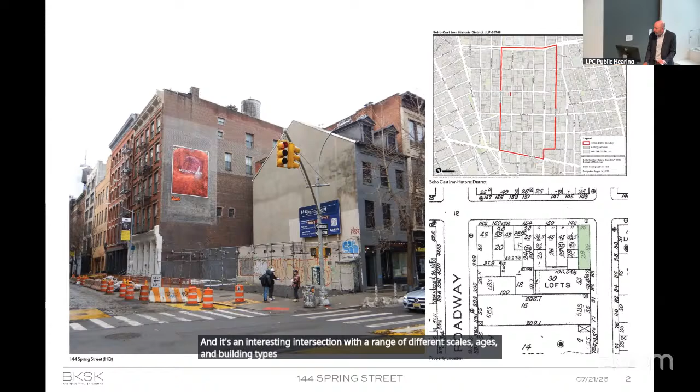On the left is the proposal that we shared with you in June, and on the right is our design revision. A few things just to point out: there was broad support for a 2-story commercial building on this site. We are proposing a building in UHPC, ultra high performance concrete, and there was interest and support for that material.

And the comments that we heard focused in 3 areas. One was just the detail of the UHPC and a desire to see a little bit more study there. You asked us to study the bulkhead and reduce the presence of it and integrate it into the overall design. And also there were comments about reducing the amount of signage that was included in the proposal.

And on the right, our response top down includes modifications to the materiality, height, and color of the bulkhead to reduce visibility and integrate the building and the bulkhead together. We've addressed the articulation of proportionality of the facade and the materiality. And then finally, we have reduced the amount of signage incorporated into the facade.

Just quickly, looking at the site, on the left, that view of the corner and the adjacent 1820s federal style house and the other commercial buildings along the south side of Spring Street, and then a view looking north up Wooster of the vacant lot.

And as we move around the corner, this is around the intersection. This is to the north on the northwest corner, an 1818 row house with an addition approved by the commission in 2010 directly to the north behind it. And then large scale loft buildings, this one on the northwest corner from 1896. And then another store and loft building, this directly to the east, now on the southeast corner of Wooster and Spring Street. So a range of styles and scales at this corner.

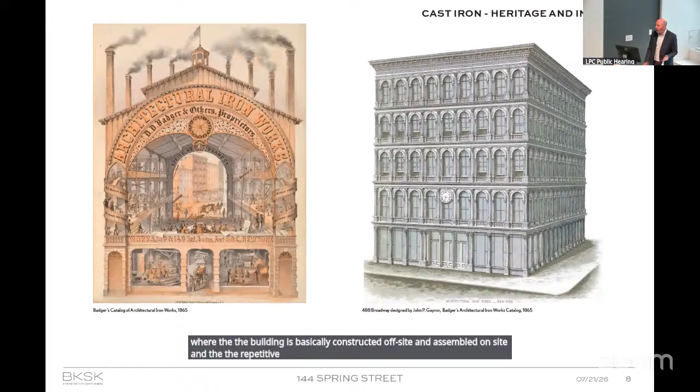And then from that catalog, on the right, an image of the Haughwout building on Broadway, built in 1856. Significant, I think, is this idea of replicating masonry in this cast material, and we've obviously drawn on that concept in the integration of UHPC. The ideas of fabrication, or prefabrication, that come with this material, both the cast iron and the UHPC, where the building is basically constructed off-site and assembled on-site, and the repetitive use of ornament across the facades. Then finally, another page from Badger's catalog, this idea of light transmission.

This is a slide illustrating the presence of vault lights that were integrated into historic cast iron buildings to bring light down into the lower levels. But of course, the facades were also intended to be light transmitting systems, not just at the storefront level, but on the upper floors for manufacture and commercial activity. The images on the right show cast iron and glass vault lights, and on the lower right, the transition from cast iron to concrete vault lights around 1900.

And all of these ideas are informative of our design. David.

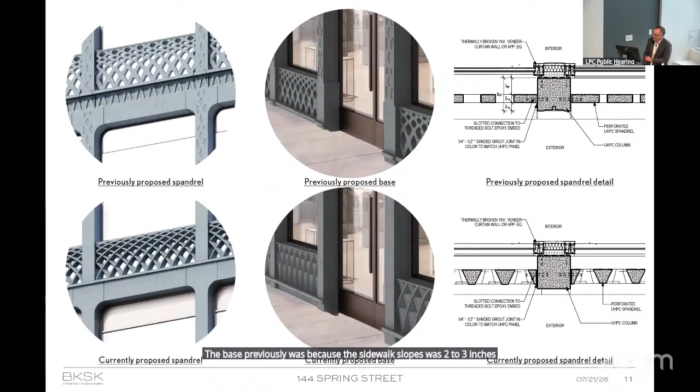Also, in the middle two images, you can see that the base of the building was given a little more dimension. The base previously, because the sidewalk slopes, was 2 to 3 inches above the sidewalk, but in the current design it's approximately 10 inches from the sidewalk.

So here again, you can see a before and after. To touch on the pattern first, by removing the pattern from the columns, we're really pleased with how the primary structural frame reads hierarchically, first and clean. Then the pattern is reserved for those infill elements and a little bit of a decorative moment at the crown of the building, at the top.

You can also see here how the parapet was raised 3 inches, from 3'6" to 3'9". That helped mediate the visibility of some of the rooftop elements. And then just adjusting the signage—on the ground floor, showing something that feels a little more proportionally appropriate for the size panel it sits in. Finally, at the base of the sidewalk, you can see that increased height, which gives it a little more of a substantial base as it meets the sidewalk.

Just looking at the wall section, the little diagram on the left, you can see how the spandrel panels now have that tapered dimension, being 3 inches deep and about 1 inch on the face. The effect of that in elevation is it both feels substantial and appropriate for the overall facade, but at the same time has some detail and finesse to it, so it doesn't feel too schematic or too simple.

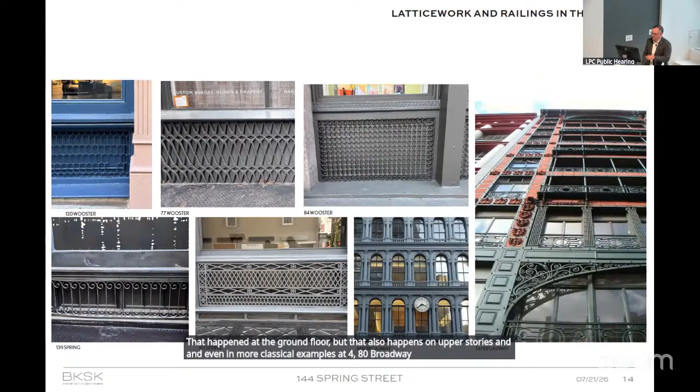Just a reminder that the pattern for us grew out of inspiration from a lot of the existing mesh iron panel work that you see on these spandrel moments throughout the district. What we found was that they'd be quite abstract, simple geometric forms, repeated in an offset kind of pattern to create an interesting texture. That happened at the ground floor, but also happens on upper stories, and even in more classical examples at 488 Broadway, with the balustrade sitting in front of the clear glass window behind.

In terms of palette, we're still looking at this bluish gray UHPC tone, and the storefront remains the same as what we showed you before, with this warm bronze painted finish for the aluminum elements. And the painted metal finish, that smaller chip, would be for the bulkhead, so it could color match the UHPC.

Just a comparison of where we were and where we are. This is the previously proposed elevation. If we skip to the next, you can see the previously proposed in a dashed line with the currently proposed in a solid line. The roof of the bulkhead structure was lowered from 11 feet to 10 feet, and the height of the glass was reduced from 9 feet to 7 feet. That's what really allowed the big differences in terms of visibility from the street.

In this area, there used to be mechanical equipment and mechanical louvers. We were able to relocate that to the other side and keep everything on the north side, using a perforated metal screen there instead, which allowed for a simpler, quieter reading to that box volume on the roof. Here again, you can see the parapet was lifted ever so slightly, from 3'6" to 3'9", which also just controlled the visibility a bit.

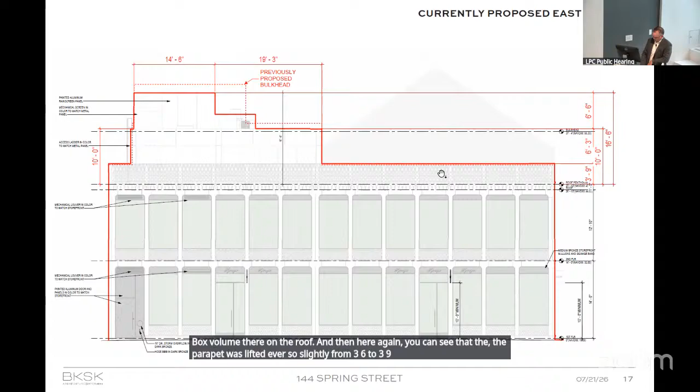Here in section, you can start to see the relationship of those panels and how they're tapered and how they sit in front of the glass. Very similar from before, but that tapered pattern really changes the reading of those panels. You can see in elevation the pattern is actually more solid at the base and opens up as you go higher up into the building. So it still feels substantial, but it has a nice detail to it at the face.

Just a reminder, as Cass said, just like the cast iron elements historically, these UHPC elements would be prefabricated and could be assembled on site with minimal seams between the elements, and really lends itself well to the sort of repetitive detailing and composition to the facade. This is just a diagram on the left for the column and beam panels, as well as the decorative spandrel panels and how they would get assembled on site. The detail in the upper right is just another good view of how the tapered profile would show itself.

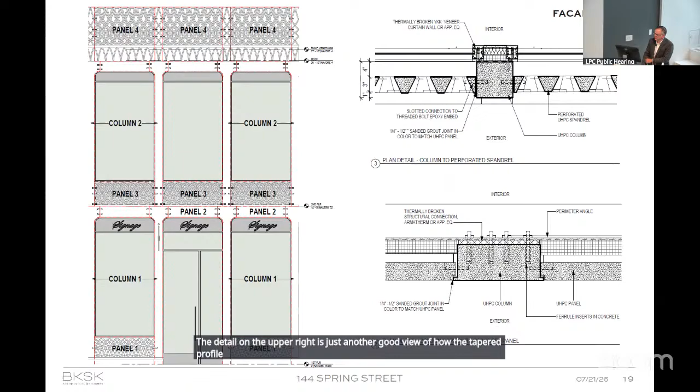Just another more detailed look at the panels and the signage panels, documenting what you saw in elevation in terms of the lettering height, the metal panel height, as well as the flag sign and where that occurs.

This remains the same from the last proposal in terms of we do have a linear light that runs just behind the decorative spandrel panels, giving a soft glow behind these patterned panels at nighttime to accentuate that pattern in the reading of the building.

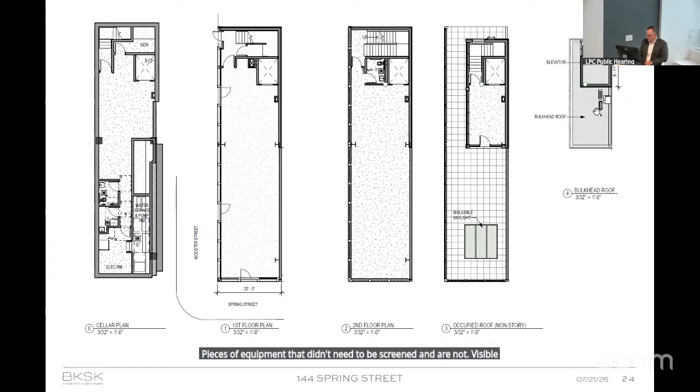So just concluding the previously proposed and the currently proposed, seeing again the differences in the bulkhead adjustments and also further clarity in the design of the UHPC and the hierarchy between the elements.

Okay, commissioners, questions? Commissioner Chen.

Yeah, I'm glad you made the modification to reduce the rooftop addition. And then I'm wondering whether by raising the 3 inches on top of the parapet, have you done a study after making modification without adding the 3 inches?

We looked at both. We thought that this was still the best approach without adjusting it too much. So the options for that parapet are anything between 3'6" and 4 feet. You don't want to go above 4. We tried all of those. 4 feet felt like too much, but the 3'9" still felt good in terms of the balance of the elements, and still having a celebratory top, a sort of celebratory crown to the building, but not overpowering.

Commissioner Jefferson? So a question of architecture versus function. The second floor, you have this strip, used to be for lettering, no longer functional. Why keep it? We did look at that as well.

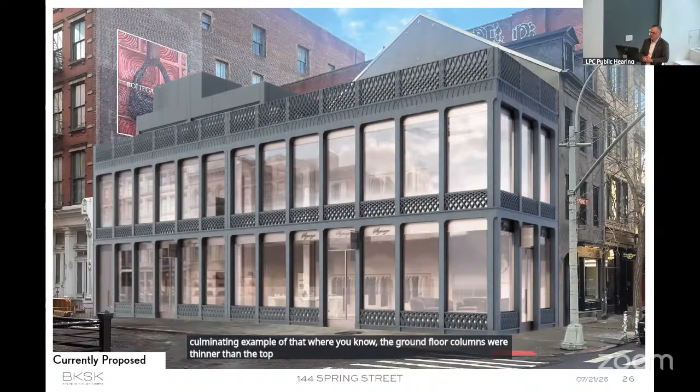It's a great question. So when we looked at the district, we were really interested in the evolution of technology and how cast iron created this sort of story and journey about how architects used it. It began as a faithful recreation of classical stone facades, and then eventually it became its own language. The cast iron could achieve things structurally and proportionally that you would never do in actual stone. 101 Spring Street we showed in June as a great culminating example of that, where the ground floor columns were thinner than the top story. And so that journey was inspiration, and what we said to ourselves was, what's the next chapter in terms of materials that architects could use to reinvent the styles or the languages within the district?

And it felt like UHPC is sort of today what cast iron was then, that it's a prefabricated material. It can take relief and pattern. It could be prefabricated, it could take these soft curves and shapes to it. So it's a very plastic and moldable material. For us, it felt like the next natural evolution in this district in terms of technology and innovation. Thank you.

Any other questions, commissioners? Okay, not seeing any other questions.

I just want to note that we received the following comments since the June 9th public hearing: the Victorian Society of New York recommended denial of the application.

So this is a proposal to construct a two-story commercial building, a taxpayer typology, in a district with a wide range of scales and styles, in a design that is a contemporary interpretation of the cast iron buildings in Soho, like we just heard.

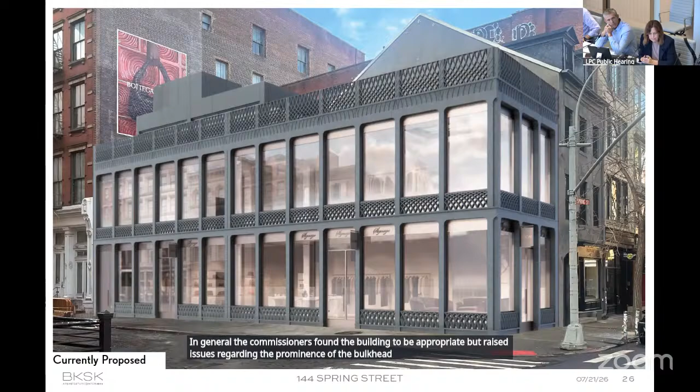In general, the commissioners found the building to be appropriate, but raised issues regarding the prominence of the bulkhead and made suggestions regarding lowering its height and changing the color, suggesting a stronger building base, reducing the signage, and some made suggestions regarding the profiles and details of the panels.

The applicant has revised their design to address many of these comments. Commissioner Ginsberg, would you like to start our discussion?

Yeah, so I found this appropriate last time. I think you've made it better. I will always say I wish there wasn't the screening requirement for the mechanical equipment—I'm going to be a broken record on this—but since there is, you reduced it. I really have no issues with this, and I think the refinement of the panels does make it better and more fitting. I think this is a really nice modern interpretation with a modern material of the type of cast iron architecture that Soho is known for.

Commissioner Jefferson. I find this totally appropriate. I think the revisions they made were wonderful. They made the screening much more muscular rather than two-dimensional—they made it three-dimensional. And with the penthouse being the same color as the building, everything has become much better.

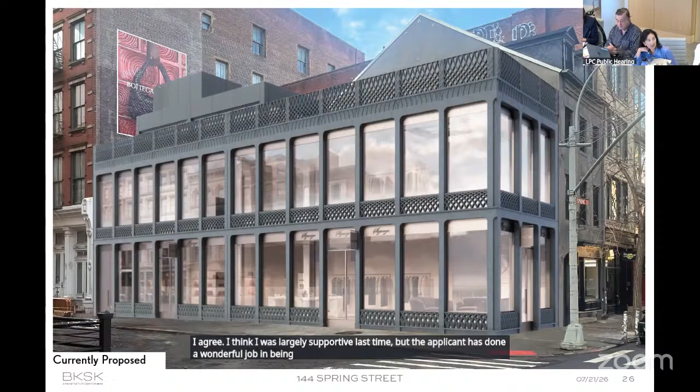And Vice Chair Master. I agree, I think I was largely supportive last time, but the applicant has done a wonderful job being responsive to our comments in terms of minimizing the visibility of the bulkhead, making it blend, increasing the parapet. It was also very effective reducing the signage, and the little changes to the details they made for the facade significantly improve the building. So congratulations, this is wonderful.

Great. And Commissioner Mahan and Wilder, I know you weren't here last time. Okay, so it's two of us, I guess. Not alone. Okay, that's good. Thank you, Commissioner Mahan.

I wasn't here last time, so that may be a reason for having a little bit of a different take than the other commissioners so far. I can certainly find the massing and scale appropriate, the inclusion of the parapet, the setbacks, the bulkheads, and so forth.

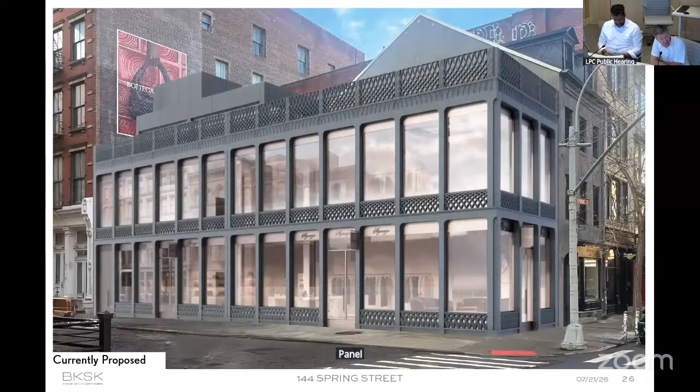I do struggle with the materiality, as I understand it, narrated by the applicant. Cast iron was initially intended to replicate masonry. Now we're using masonry to replicate cast iron, which was replicating masonry, as described by the applicant. These, though, are not the tectonics of masonry—UHPC. So I find it, the materiality and expression of the tectonic, odd—the decorative panels, perhaps. There's lots of really interesting material in the appendix of the application about how three-dimensionality was represented in two dimensions in the cast iron catalogs. The particular expression here, though, for me, is a little reminiscent of garden trellises. So there's, in my reading of this project, a fair amount of mixed metaphors that sort of lead to a lack of clarity, I have to say.

So I'm not sure that this one is for me. Commissioner Wilder?

Yes, so thanks to the applicant. It seems like they have made some updates from the previous presentation, which I was not there for.

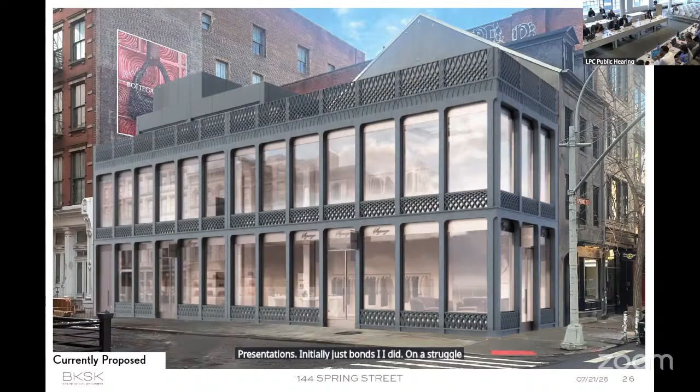Initially, I did kind of struggle with the design and mainly the boldness of it. There are a lot of elements I do like about it.

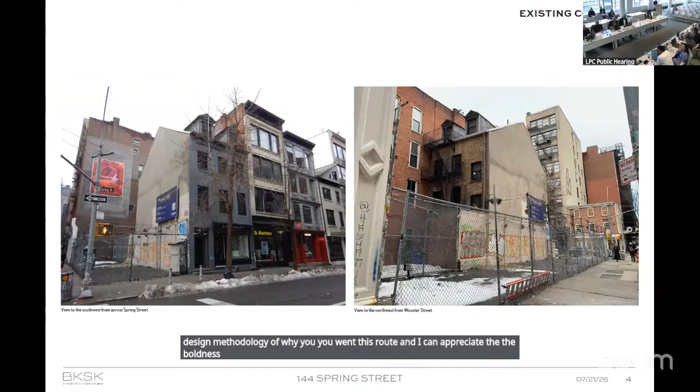I think it was a sort of calculated risk in the selection of the UHPC material, and I say calculated because I think you justified it in your design methodology of why you went this route, and I can appreciate the boldness in taking the chance. I think if you were going to do it, this is probably the best location to do it as well.

So there are things that I like about it. I do enjoy the panels. For me, those are the elements that tie it together and make it work more for me. If they weren't there, I would probably struggle more with it.

I do think that it's too high at the parapet. I think that is probably better. I want it to feel a little more like the spandrel, in terms of the height and scale.

Yeah, it's the analogy, the cast iron. It's pretty interesting, right? I think the building looks good. I'm just struggling with the material overall.

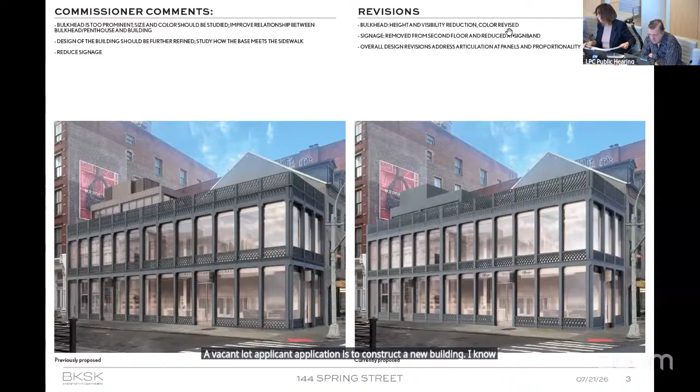Yep. With regards to LPC 26-10512, 144 Spring Street, Soho Cast Iron District, a vacant lot application is to construct a new building. I note that the Soho Cast Iron District is characterized by a range of 19th century building types, including former residential buildings from the early 19th century and larger cast iron and masonry commercial buildings from the second half of the 19th century, as well as low-scale 20th century commercial buildings and two-story garage taxpayers.

I also note that the immediate surrounding landscape features a mix of surviving and altered federal houses ranging from 3 to 5 stories at Spring Street, and large cast iron store and loft buildings ranging from 4 to 6 stories on Wooster. I recommend approval,

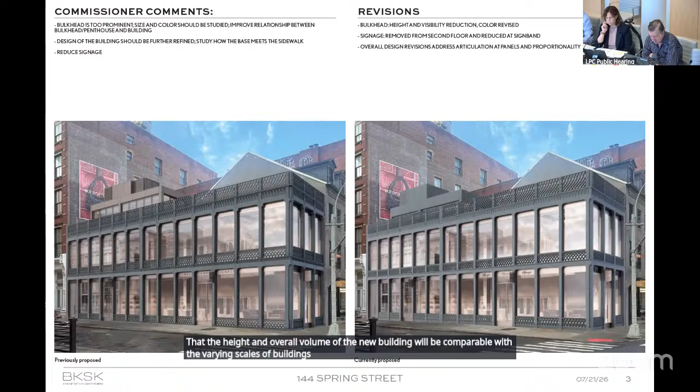finding that the construction of a new building on this vacant lot will provide a termination to the block and will strengthen the streetscape of the corner site, that the height and overall volume of the new building will be comparable with the varying scales of buildings along both block fronts and particularly Spring Street, which features several small-scale buildings, that the plane of the facade will align with the facade of the adjacent properties, thereby reinforcing the street wall, a consistent feature of the streetscape, that in addition to the 19th century store and loft buildings, there are a

variety of other building types in the district, including 1 and 2-story garages and taxpayers, federal houses, and 1930s and late 20th century commercial buildings, which in some cases are either a site-specific response or a zoning-responsive design like the proposed new building.

That the design of the building utilizing cast iron-inspired ductile concrete cladding will employ the latest structural materials in construction and assembly and will recall the evolution of materials in the historic district, which illustrates the evolution of building technology from wood frame houses to masonry, load-bearing construction, and cast iron assemblies, which strive for transparency by encompassing large

areas of glass. That the highly detailed organic pattern precast ductile concrete columns, beams, and cornices, three-dimensional open spandrel panels and railings, all with gray finish, and the simply detailed recessed display windows and entrances at both facades will harmonize with cast iron buildings throughout the historic district.

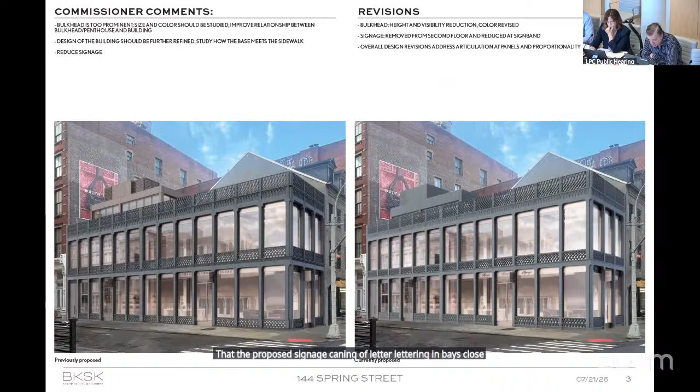That the proposed signage consisting of lettering in bays close to Spring Street and Wooster Street entrances and a blade sign adjacent to each door will be well scaled to the building and in keeping with the signage historically found throughout the historic district.

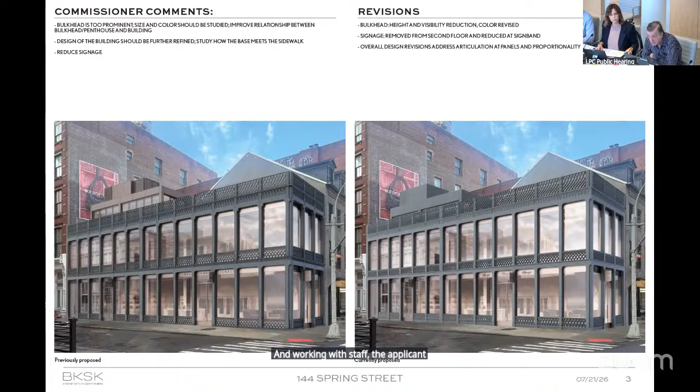That the gray metal cladding, penthouse bulkhead, and mechanical screen are simply massed and subservient to the primary facade below and will blend with the building and be consistent with the existing rooftop accretions found within the district, and that the new building will enhance the special architectural and historic character of the streetscape and the historic district. And working with staff, the applicant can play with the exact height of the parapet.

Vice Chair Master, can you second the motion? Second. And Mark, can you call the vote?

Chair Krusevich, Aye. Vice Chair Master, Aye. Commissioner Chen, Aye. Commissioner Ginsburg, Aye. Commissioner Goldblum, Commissioner Quembe, Aye. Commissioner Jefferson, Aye. Commissioner Mahan, Nay. Commissioner Wilder, Aye. With 8 in favor and 1 opposed, the motion passes.

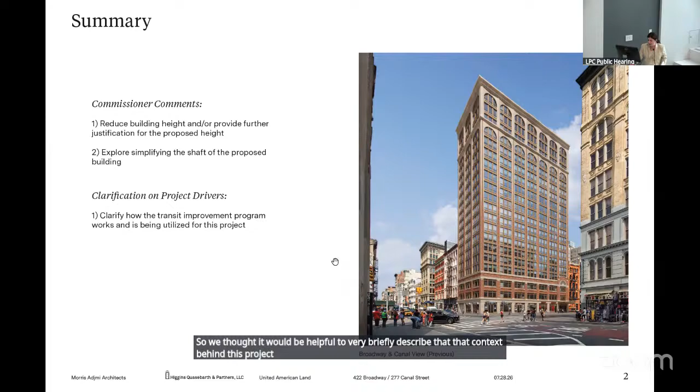It goes without saying, the city is facing a housing crisis, and tackling that crisis requires both ambition and urgency. Creating housing and affordable housing was a chief goal of the Soho-NoHo rezoning in 2021. When it adopted that rezoning, the City Planning Commission noted the particular importance from an equity perspective of adding housing in an opportunity-rich neighborhood that lacks income-restricted housing. That neighborhood rezoning was a precursor to City of Yes for Housing Opportunity in 2024, the single largest change to the zoning resolution since 1961.

Zoning for accessibility is another citywide initiative crafted to make the city more livable by making the transit system more accessible and more quickly. Just 155 of the city's 493 subway stations are accessible. The ZFA text offers a floor area bonus in high-density areas for developers that design, construct, and finance major improvements to a mass transit station. The MTA has identified the Canal Street station as a priority in its current capital plan.

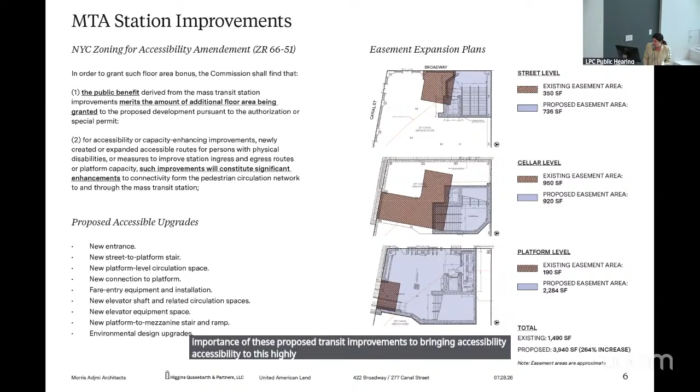As compared to the proposal seen in 2023, shown on the left here, the height of the development has increased to accommodate the ZFA bonus, as shown on the right.

As a standalone site, 277 Canal Street would not generate a sufficient bonus to cover the costs of making a, quote, significant enhancement to the transit network. In order to finance the cost of the improvements MTA requested, the owner made a deal to merge the zoning lot with an adjacent site, seen here in the key plan on the top right. The zoning lot merger increases the maximum bonus available to make the transit scope feasible.

As a condition to merging the zoning lots, the owner of the adjacent parcel required a minimum transfer of development rights, shown in pink. That transfer results in the delivery of additional housing units, including affordable units. In total, the project will deliver 159 new apartments, including 31 affordable units.

Good morning, Commissioners. Christopher Courtney from MA Architects.

I'm going to run through two of the comments that Commissioners asked us to address: explore simplifying the shaft of the proposed building, and reduce the building height. First, I'm going to explain the reasoning for the shift in the building height within the shaft of the building. Previously, I'd only explained that as a marketability concern or issue.

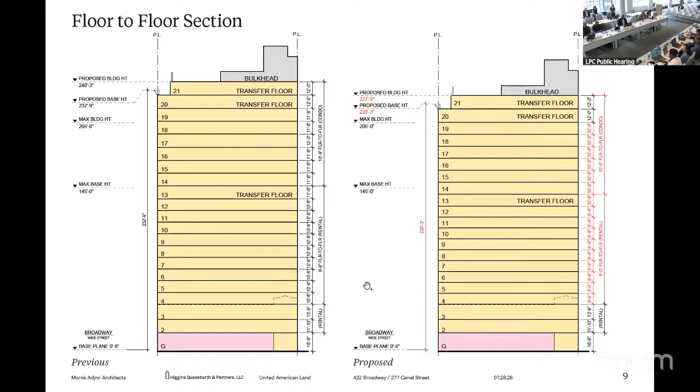Okay. Oh, two minutes, but that's okay. You got it. All right, fantastic.

Thank you. So why 9 feet and why 10 feet? Again, we worked with brokers. We talked through what the minimum standards are in the district in general, which happens to be the same as the whole city. So that's 10 foot for condos as a minimum and 9 foot for rentals, basically just to meet the market. So the building is meeting the minimum market standards moving forward.

Jumping back a little bit to the height difference in the middle of the building, we're zoomed in here to show what's actually happening at the facade when we jump the floor height. So we're at the 12th floor and the 13th floor. We have 9'9", this is the floor to floor.

Again, that's a 9 foot clear, 10'9". All of the floors have the same fenestration pattern of a fixed panel with an operable sash above. Rather than having any of these be the same height as each other, we've given a strategy to break that down and blend dimensions, so for instance 2 feet jumps to 2'3", 5'3" jumps to 6 feet. This is the same strategy we had previously, we just hadn't really gotten into it much to show.

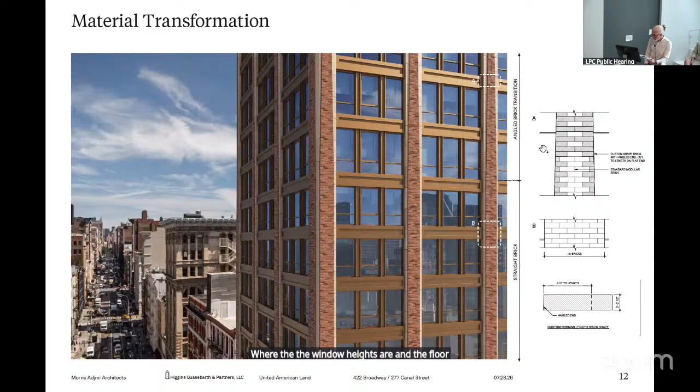As we can kind of compare here, there's a lot more of a balance. Previously, the change was happening as a proportional change through the body of the building only, in equal parts. So the change is really to give more deference to the crown and to read a little bit more distinctly, as opposed to more of a blend, which was happening previously.

Here, if it's helpful, there's a little marker to kind of understand where the floor heights change, and we feel that that's not perceptible from the street as much.

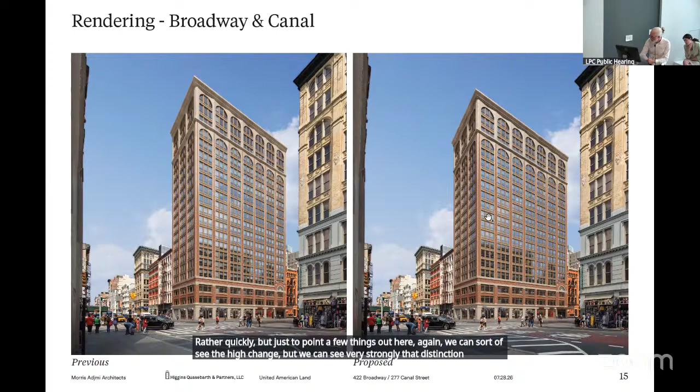Here we can certainly see the height difference change, again 12'6", just a little bit over the height of a floor. Here, certainly from further away, the perception of the floor height shift is not perceived. That's happening right here.

Here we took the opportunity, it's hard to see in this slide, but we took the opportunity to actually lower the spring point that's happening on the sort of faux pilasters on the lot line. You can read that a little clearer here, where previously you could actually read where that change was happening. We wanted to kind of mask that and pull that down.

In this case, the faux arches are the same width as they were, the faux pilasters are the same width as they were. We're just pulling that down and stretching it so that it's out of view from the street above the adjacent buildings.

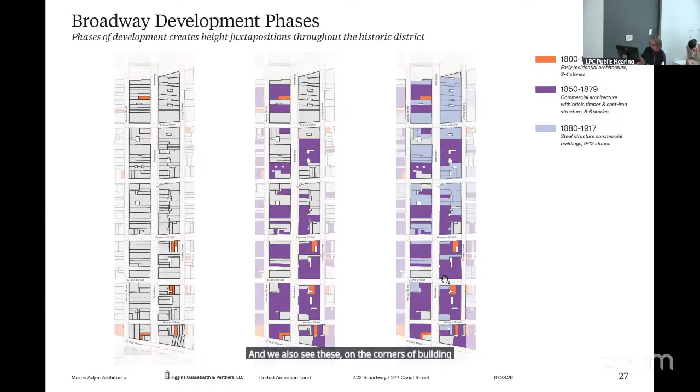We also see these specifically on the corners of buildings in the district. So here are two examples, and again these are just select examples - it happens along Broadway. But looking at the corner specifically, and the condition where we step down to a lower scale on the side streets.

Immediately to the north of our block on the corner of Howard and Broadway, we have 434 Broadway, and you can see the step down along Howard Street. We've provided the proportional relationship of the flanking buildings here. The adjacent building on Howard is 125% smaller than the corner building. We have a later building outside those significant periods of development, but it speaks to the character of the variegated streetscape and abrupt changes in scale on Broadway. That's something close to 350% taller than the adjacent building at 440 Broadway.

Moving north a bit to 458 Broadway, on the corner of Grand Street, we have that late phase tall building anchoring the corner, and then the stepping down of the earlier phases. Here you see the earliest phase and then a somewhat taller building. This characteristic up and down that we see on Broadway, which is more populated with tall buildings, but on the side streets there's a distinctive step down in scale and character. That's a sort of 200% decrease in scale.

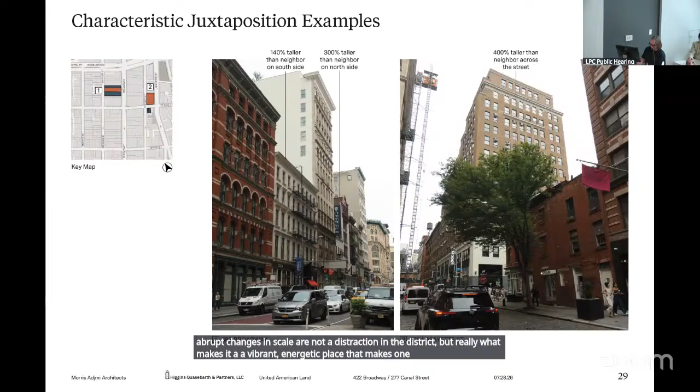So this is how you experience the buildings. This juxtaposition and abrupt changes in scale are not a distraction in the district, but really what makes it a vibrant, energetic place that makes one look up in the district. We see that in the overall streetscape.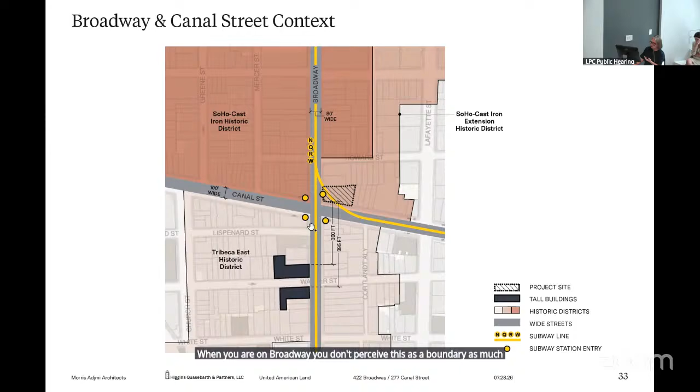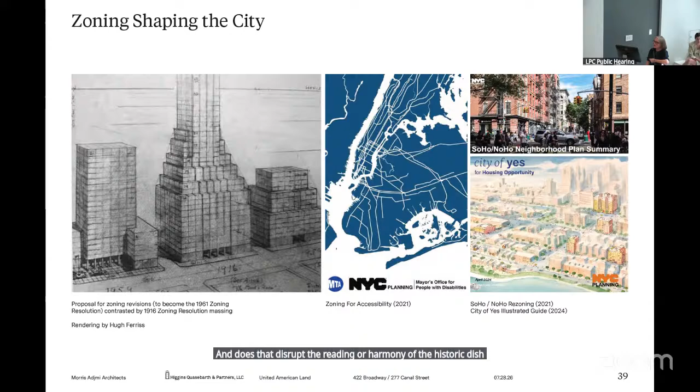This proposal is really in the context of that. How do you shape something that needs to deliver on all these important civic initiatives and be of today? Does that disrupt the reading or harmony of the historic district, or does it stimulate it? Does it energize the streetscape? Does it create something new? Our argument is that it creates something new and stimulates the environment.

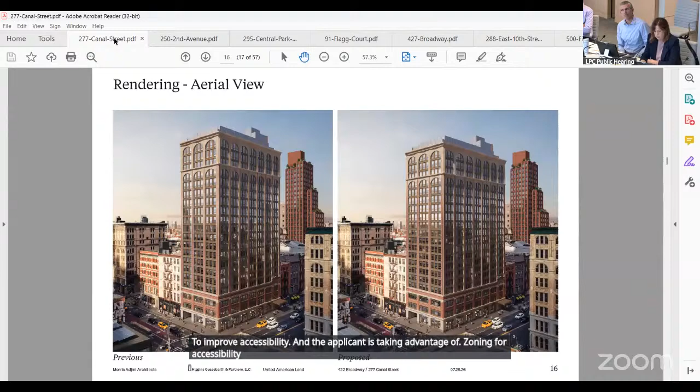MTA designated this as a high priority site to improve accessibility, and the applicant is taking advantage of the Zoning for Accessibility program, a citywide program to promote subway accessibility. The site also is unique in that it fronts 2 wide streets, Broadway and Canal, both of which have taller buildings, changes of scale, and a variety that are different from some of the smaller streets in the Soho district. That's something most commissioners noted in the last hearing. In addition, Soho is a district that can be dramatic in terms of differences of scale between adjacent buildings and buildings on the block. So that is another factor to consider.

Oops, my mouse is going nuts here.

At the last hearing, commissioners all agreed that a taller tower addition to the 3-story historic building is acceptable. Comments were largely positive about the overall proposal and the transit improvements, and positive about the storefront infill and signage master plan, unchanged from the prior approval. Many commissioners asked for further explanation on the appropriateness of the building given its height, and many found that the proposed height, given the location on 2 wide streets, to be appropriate. However, most commissioners recommend that the floor-to-floor heights be consistent to lower the overall height of the building.

There were some design recommendations. Several commented on how it accentuated the verticality and questioned that approach. The applicant has come back and has been responsive to many of the commissioners' suggestions, including reducing the overall height by lowering the floor-to-floor height of most of the floors, although it's not consistent, as we've heard, and adjusting the transition of brick to terracotta at the piers to help de-emphasize the verticality of the facades. And they came back also with a stronger justification for the appropriateness.

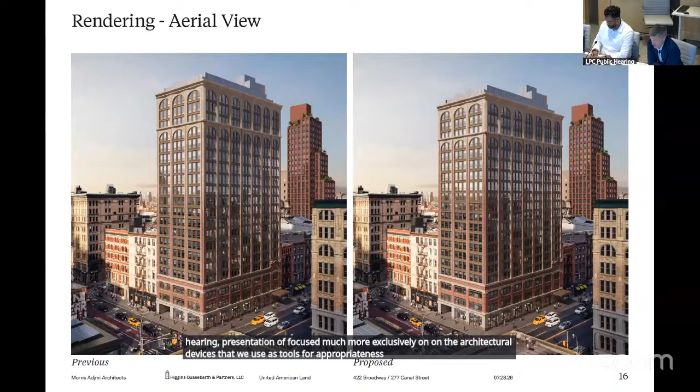The public hearing presentation focused much more exclusively on the architectural devices that we use as tools for appropriateness. However, those cannot only be self-referential; they can only be found appropriate in how they relate to the context. And so I really appreciate the level of sophistication that this team brought and the level of scholarship that was brought to this argument.

I actually think it's quite necessary to carry the day for a project of this magnitude and complexity. I found the abrupt changes in height, the juxtaposition, to be meaningful and notable.

I think it is important. It is a characteristic of these two streets. I went and walked around these two streets recently after the public hearing to get the feeling for the energy. And I think the energy of the people and the commerce that occurs here is reinforced by the kind of surprise, juxtaposition, the kind of jumble of architectural scale and style.

I think those things mutually reinforce one another. I agree with Commissioner Goldblum about the metrics, the devices, but I think the underlying ideas is completely sound and important.

I think the fact that these are both wide streets is important. The fact that taller buildings occur at corners is important. I think the proportions are notable. Particularly helpful was 458 Broadway, which has proportions similar to this particular building.

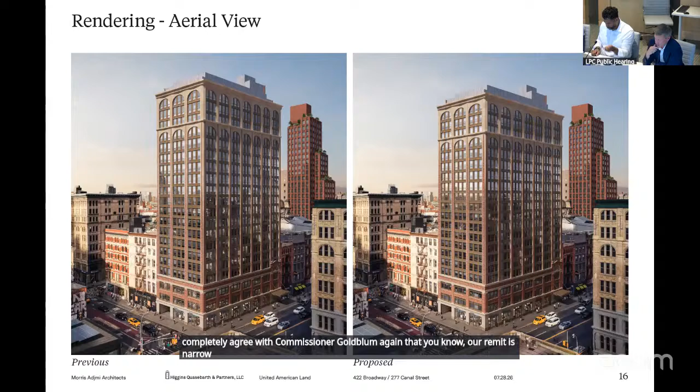In closing, I completely agree with Commissioner Goldblum again that our remit is narrow in analyzing appropriateness. But this is a project that reminds me how somehow I'm always amazed that preservation becomes the kind of locus and expression for a whole host of social and community issues, and they are the context.

The background against which we are measuring appropriateness: local community concerns, including identity and change and historical continuity in our management of change, changing construction technologies, as the applicant talked about, civic needs such as housing, as they're expressed through zoning and finance, and even Aaron's shock that shopping is not as of right in Soho, all found expression in this project. So I can find it appropriate.

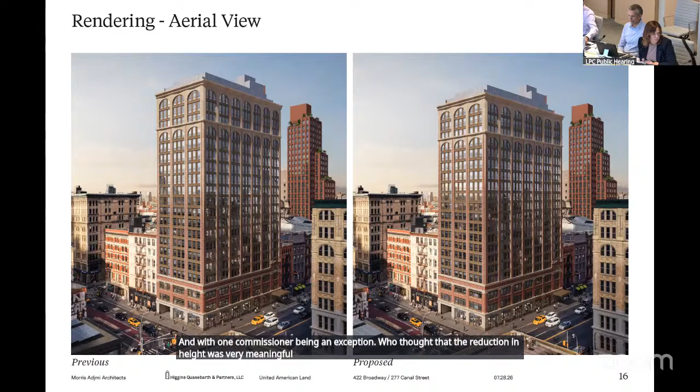Thank you. So Commissioner Goldblum, I think we can make a motion. I think we have a majority of commissioners who felt that regularizing the floor-to-floor heights was more important than the reduction of the overall height, with one commissioner being an exception, who thought that the reduction in height was very meaningful. So I think if that's the majority, then that's probably the way to go with that direction.

But again, I think as another way to make it regular, by the way, not that I think that they would do it, is if you interspersed rental, condo, it would be very uniform.

I would suggest we go approve it as the majority suggested, and then if there were opportunities for minor adjustments, we would go along with that as well.

Got it. Regarding 277 Canal Street, also known as 277-289 Canal, 418-422 Broadway, in the Soho Cast Iron Historic District Extension, the application is to construct a vertical enlargement and establish a master plan governing the installation of storefront infill and signage.

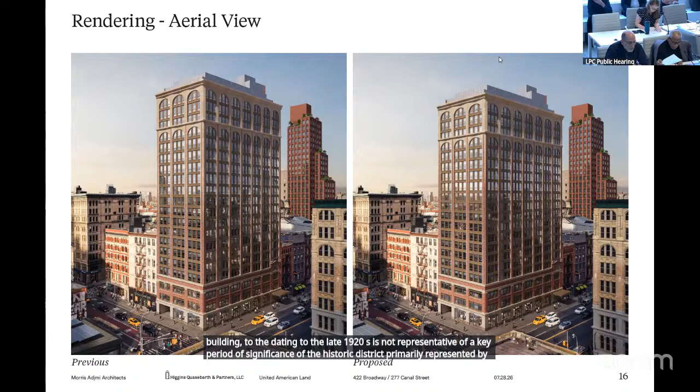I recommend approval with modifications, finding that the existing 3-story building dating to the late 1920s is not representative of a key period of significance of the historic district, primarily represented by its 19th century cast iron store and loft buildings. That this simply designed building was originally built as a theater, a use that does not relate to the commercial and manufacturing history of the district, and that its height does not define its typology. Therefore, constructing a large vertical addition will not detract from the architectural style of the building or of the special historic and architectural character of the Soho Cast Iron Historic District extension.

That there is a historic precedent in the Soho Cast Iron Historic District and its extension for vertical building extensions constructed in plane with the original building base and designed to be an integral part of the facade. The Broadway and Canal streets are wider than other streets within the historic district and feature corner buildings which are often notably larger than the buildings found on the side streets, and that the existing building features a larger lot area and longer street frontages than the typical lots in the district. Therefore, total building height could fit well with the overall scale of the streetscapes.

But there is historic precedent throughout the city for buildings featuring entrances to major subway hubs being taller than surrounding buildings. Therefore, a taller building at this location, which includes entrance to multiple subway lines, will continue this typology. That significant juxtaposition of buildings with differing heights is a condition found in the Soho Cast Iron Historic District and extension, particularly along Broadway.

That the composition of the vertical extension set upon the existing building as a base, with a taller middle shaft featuring tripartite window bays with spandrel panels at each floor and a 3-story crown and cornice, reflects the typical composition of other tall masonry buildings within the historic district, and the historic building at the base will remain legible.

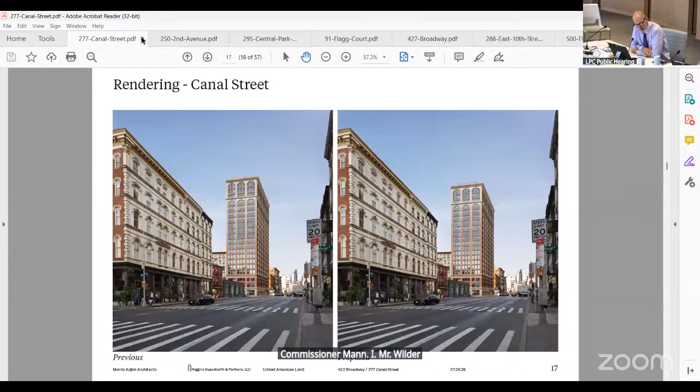This is Stuyvesant Square Park, a public park originally designed in the 1840s and redesigned by Gilmore D. Clarke in 1937, including a restroom building built in 1937. The application is to replace and modify planting areas, fencing, pathways, and paving, replace windows and install security grates, and regrade a section of the park.

This was last presented at the public hearing of March 24th, 2026. No action was taken at that time. The applicants will present revisions to the proposal in response to your comments after we open the proceedings.

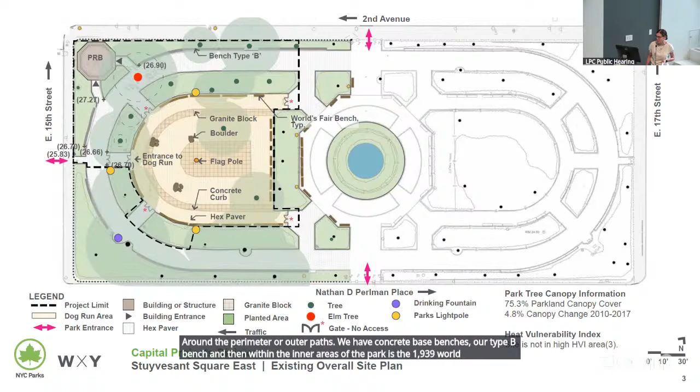So our existing conditions in the upper left is that public restroom building that has steps leading up to it. The paths are all asphalt hex block. That center yellow area is a very popular dog run. Around the perimeter or outer paths, we have concrete base benches, our type B bench. And then within the inner areas of the park is the 1939 World's Fair benches. And then that red dot again is that tree that's planted in the middle of the path.

Here are some images of our public restroom and the tree in the path. As we discussed at the public hearing, it's not possible to make this path accessible without removing this tree, which is not something we'd consider for a variety of reasons, especially its significant environmental benefits. But the roots of the tree extend about 25 feet from the center and are heaving the pavement, causing a dangerous condition that is impassable for someone with mobility issues. We've been working very closely with our parks arborists, who are experts in urban tree health.

Here's a view of the dog run on the left and then an image looking south toward the public restroom.

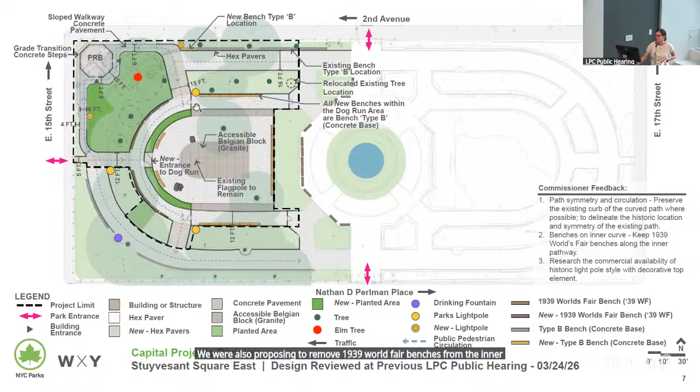This was the plan we presented back in March, and a brief summary of the feedback we received. We were proposing to cut off this path entirely and expand the planting bed for the health of the tree, and also to remove the dangerous walking conditions. We proposed sloped walkways to provide barrier-free access to the public restroom building, and installing 2 new light poles to illuminate those paths. We were also proposing to remove the 1939 World's Fair benches from the inner curves and replace them with the type B bench, typically along the outer paths of the park.

The feedback we heard was related to concerns about what cutting that path off does to the symmetry and circulation of the park. There was concern about changing the 1939 World's Fair benches for a different bench type at the center, as that would be inconsistent with the historic design. And then we were asked to look more closely at our design for the proposed 2 new light poles.

Sorry, went the wrong way. Okay, so this is our revised plan. We are no longer proposing to completely remove this path, but we are proposing to preserve the curbs in place and remove only the hex block from the center. We are no longer proposing to replace the 1939 World's Fair benches with a different bench type, and we are also proposing to restore and salvage 7 of the existing 1939 World's Fair benches. We also looked a little more closely at the lighting within the park, and I'll share more information on that in a later slide.

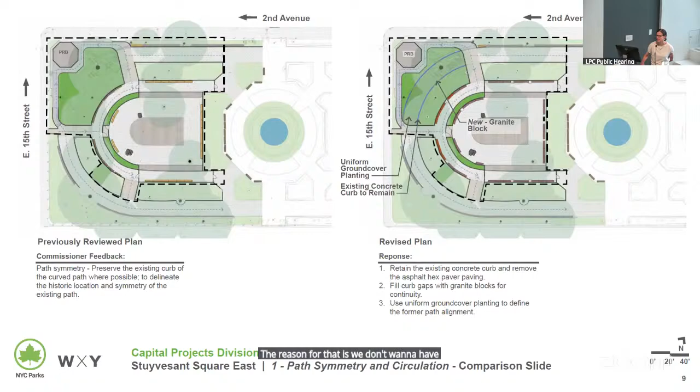One other thing I should mention is where there was a connecting path, we are proposing to install granite block. The reason is we don't want to extend the curb and do more excavation, which could damage the tree root. Granite block already exists in the park, and we want to keep this solution as reversible as possible.

Here is existing and proposed. We do need to keep this area fenced off still, as we don't want to encourage people to walk over the tree roots and compact the soil around them. But this image also speaks to the fact that this tree is not going to live forever, and when it does die, this fencing can be removed, the asphalt hex block returned, and the path fully restored.

Another image looking south.

Our planting plan: within the path area, we are proposing a low ground cover shown here on the upper left, and then within the planting beds there will be taller plants to differentiate and maintain that path-like appearance.

Regarding the benches, we are going to be using all 1939 World's Fair benches within the inner paths, no longer proposing a new bench type, and preserving and salvaging 7 benches.

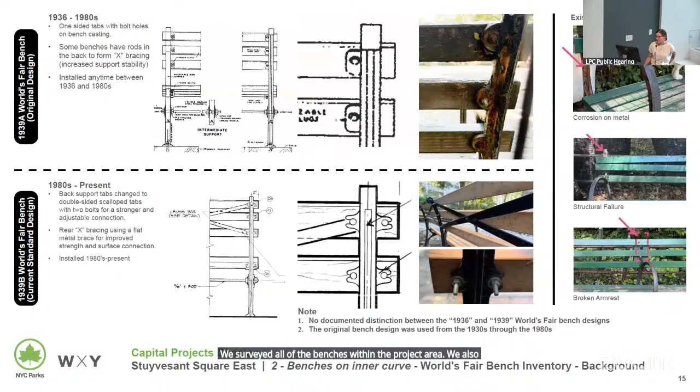After the hearing, we did a real deep dive on our 1939 World's Fair benches. We surveyed all of the benches within the project area, and reached out to the original manufacturer, still the current manufacturer of the 1939 World's Fair benches, trying to determine if there was a difference between the original design and our current standard.

The World's Fair bench was designed in 1936, and in the 1980s the design was slightly modified at the rear to strengthen the connection between the base and the slats. That was the only change we found between the 1936 and 1980s design, which we're currently using today. Here are some original drawings, the 1936 design and the 1980s design, which is our current standard. The overall dimensions and detailing remain the same.

Within the dog run, we were proposing to change the bench type to the concrete-based bench. The reason was that we had heard from the dog run people that dogs were getting their paws caught between the two front slats. So we're now proposing to modify that front slat to minimize that gap, and as you can see in the image, even the tiniest of paws will be safe, and we can keep our historic bench type.

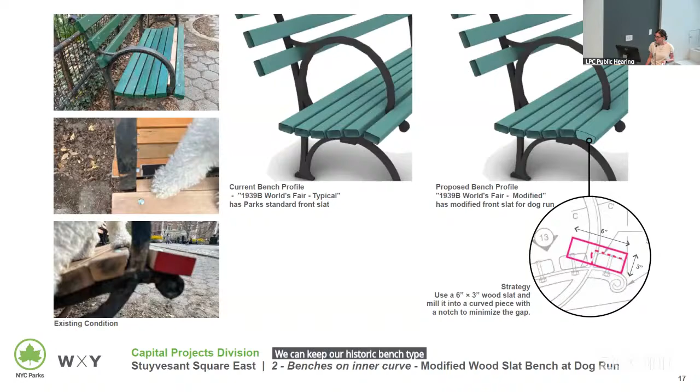So our proposal for the 2 new poles is to utilize the type B pole with the Riverside luminaire. While there are only 2 of the Riverside luminaire, it is our hope and plan that as these are replaced in the future, we will have them replaced with the Riverside luminaire, as this is a more appropriate design for a historic park. We did investigate having a custom casting done of the type E pole, but it was a bit beyond the project budget.

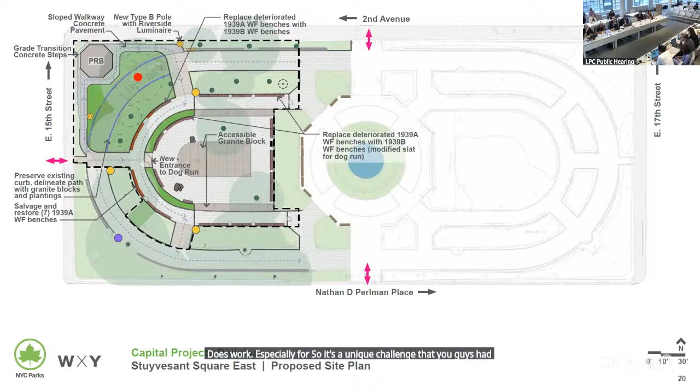Yeah, thanks to the applicant for coming back and trying to preserve as many of the details that we thought were important before. I do agree it was a clever idea to have a concrete curb. It works, especially for such a unique challenge that you guys had to deal with, and preserving as many benches and lampposts, both are a great idea. So yeah, I find it appropriate.

Great, thank you. Commissioner Mahan. Yeah, I concur. Don't have anything else to add.

Okay, Commissioner Goldblum. Thanks. Yeah, I think it's generally moving in the right direction. I think the retention and restoration of the benches is great, and keeping the bench design uniform and consistent with the historical condition is important.

I think the retention of the ghosting of the path is good. I would suggest if they could explore the possibility of taking that a little bit further. The fencing, I think, is a very strong element in how people experience the space. Could they continue the fencing along the path line? Could they change the fence where the ghost path is, so that there was some indication of the path visually continuing, even if you can't walk there? Looking at how the ramp element intersects with the center pathway, I would just say think through how you want this to look when you make it paved, and make it as close to that as possible. But I think this approach is a very good first step.

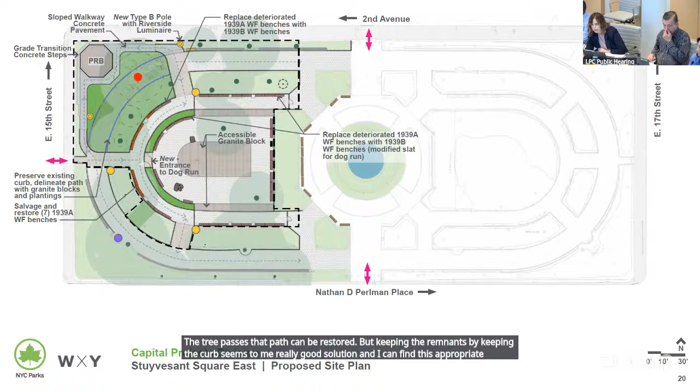And Vice Chair Master, I don't think you were here at the first one. No, I wasn't here. I can accept this as presented, I find it appropriate. I just want to say that I'm really happy as a dog lover that you guys reached out and found that the paws could potentially get stuck in the bench. I think that's very important, especially given that there's a dog run there. So I commend you for doing that.

And Commissioner Chen. I echo the vice chair's sentiment, one good thing about this is the paws won't get caught anymore. But I also concur, I think it's very clear, and I commend the Parks Department for keeping the memories alive of the World's Fair benches in the improved version. The one comment I agree with Commissioner Goldblum on, and I felt Commissioner Ginsberg as well, is the fencing. I think the fencing could be worked on. I think somehow it just pops out, and if there's a better way to treat it, I think we should explore it.

Great. So Commissioner Kwambe, I think you could read a motion and add that the applicant should work with staff on the fencing or explore the fence with the implied path, to explore the interaction with fencing and the implied path and the landscape.

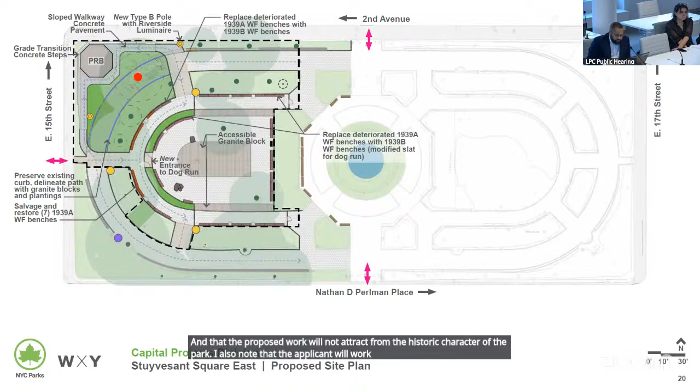That the proposed metal windows and doors at the restroom building will match the historic wooden windows and doors in terms of configuration, operation, finish, and details. And the change in materials will be largely imperceptible. And that the proposed work will not detract from the historic character of the park. I also note that the applicant will work with staff to define the path in conjunction with the proposed fencing.

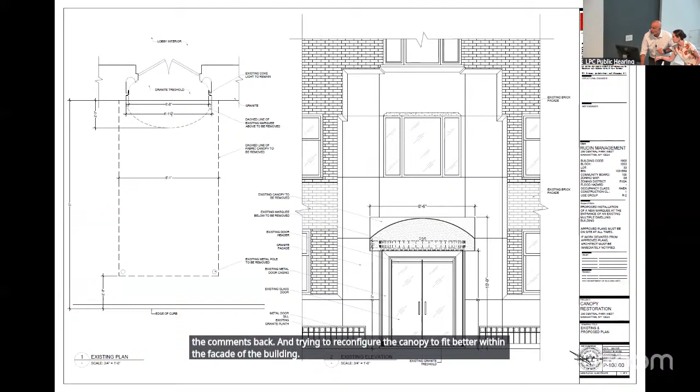My name is Joe Sultana. My firm is JLS Designs, out of Bayside, Queens. This presentation is to remove the existing fabric canopy and replace it with a fixed marquee.

From our first presentation, we started changing the shape of the canopy. The most important thing was the structural components of the marquee. Originally, there were tiebacks supporting the marquee back to the building. We've worked with our structural engineer, and now those tiebacks are not structural anymore—the marquee is structural on its own. So the tiebacks were placed in a different location.

That was one of the comments a commissioner raised, whether we could look at it not just as a single image of the canopy and the linear entrance, but along the entire front of the building.

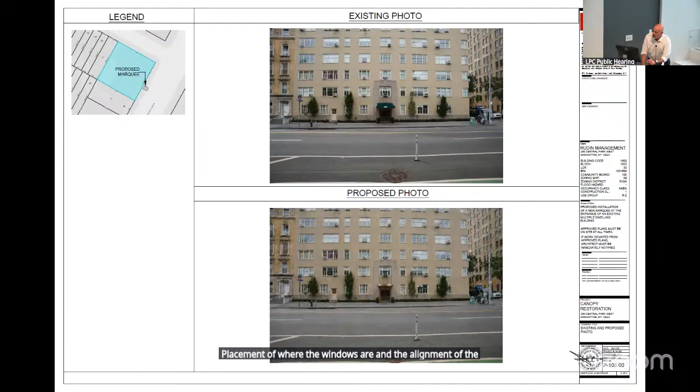So what we did—I don't know if the pictures are out of proportion—but we made it a lot smaller, basically the same size as the existing fabric canopy. We just raised it; we have to raise the bottom to 10 feet, like I explained last time. So the top line of this marquee is at the same placement as the fabric canopy.

That one on the right is the new shape. These are the two, the original and what we came up with now. I don't know if anybody has questions about the way it looks, but that's what we're presenting. Thank you.

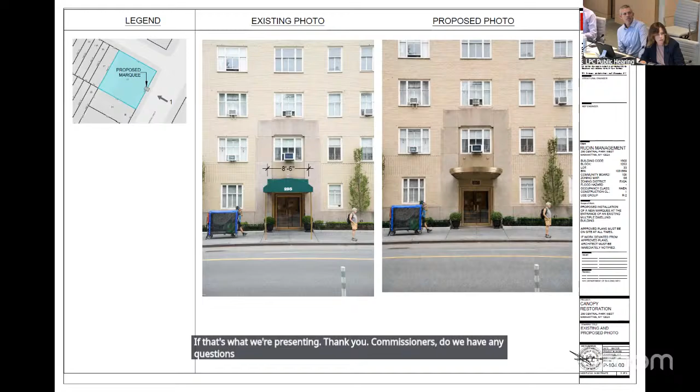Commissioners, do we have any questions? Commissioner Mahan: What material is the canopy—the marquee? Right now there's a metal painted door and existing canopy that I presented last time.

If I go back to this drawing, that area above the door that's dotted is the existing canopy that's there now. It's all painted metal—we had it tested to make sure it's not a special metal, it's just the paint. Same color.

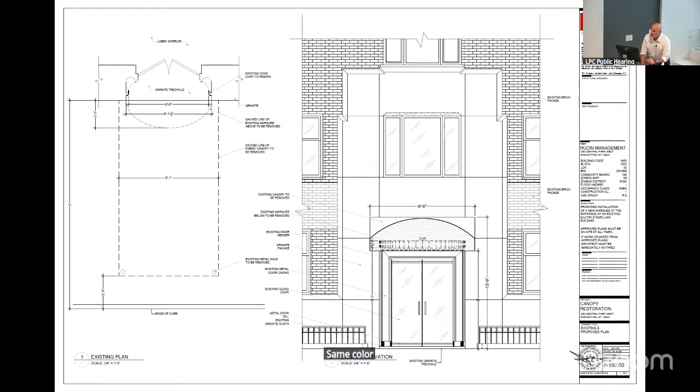Any other questions? Okay, not seeing any. We'll move to our discussion. I'll note that we have not received any testimony or comments following the March 10th public hearing. The commissioners present at the last hearing generally supported this proposal in concept—there were no objections to the materiality or design. However, they expressed concern about the size and proportion of the marquee, particularly its width in relation to the vertically oriented entrance and the building overall.

So I'll start with the commissioners who were here. Commissioner Chen, could you start the discussion? Yeah, I'm glad they made changes and improvements. I think the reduction in size and width is much more in line with what we suggested, so I find that appropriate—it works well with the proportions of the existing graphic pattern.

Commissioner Goldblum? Great, appropriate. Commissioner Wilder? Yeah, I was here too—I think it's appropriate, good job on the reduction. Commissioner Kemge? Definitely appropriate, the proportions are much better.

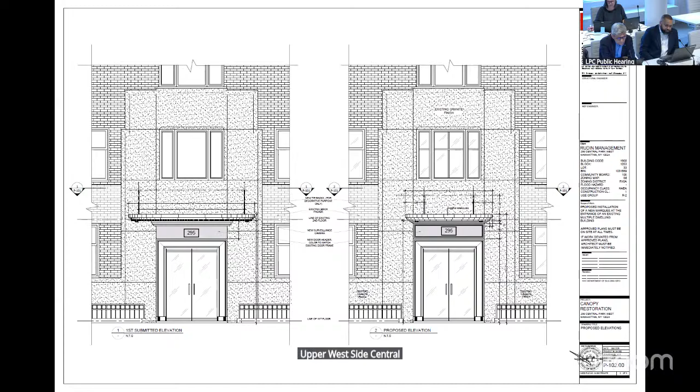Delighted to. In the matter of LPC 26-03193, 295 Central Park West, Upper West Side Central Park West Historic District. The application is to replace a marquee, noting the building style, scale, materials, and details among the features that contribute to the special architectural and historic character of the Upper West Side Central Park West Historic District.

I recommend approval, finding that the historic marquee hidden below the existing sidewalk canopy is too small to be effective and is simply designed and smaller in size compared to other marquees at similar buildings designed by the architect. That the proposed marquee will be similar in scale to marquees found at other buildings of this age, type, and style, and will be proportional to the entrance opening and the vertically oriented masonry surround.

That the brass finish of the marquee and infill panel will match the material and finish of the historic entrance infill. That the presence of the new infill panel featuring address numbers will reflect the previous location of the historic marquee, and the proposed placement of the marquee higher up on the entrance than the location of the historic marquee allows for clearance required by current code.

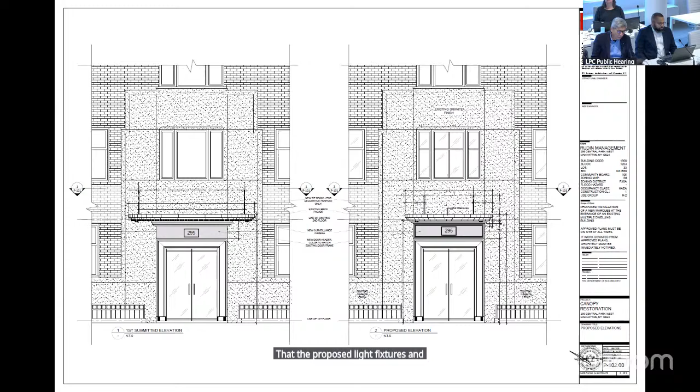That the simply designed tiebacks anchored at the areas of plain granite will not damage any significant masonry features, that the proposed light fixtures and security cameras will be well integrated into the design of the canopy, and that the proposed work will not detract from the special architectural and historic character of the building or the Upper West Side Central Park West Historic District.

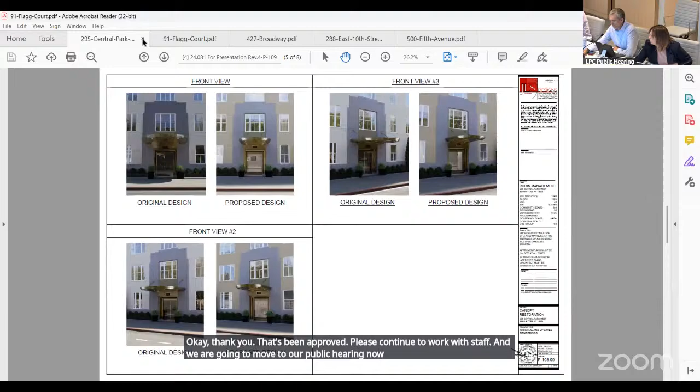Thank you. Public hearing item number 1 is LPC 26-05642, an application for a certificate of appropriateness in the Borough of Staten Island, Block 891, Lot 205, 91 Flagg Court. This is part of the expanded landmark site of the Ernest Flagg House, Gatehouse, and Gate individual landmark, specifically a garage building designed by Ernest Flagg and built before 1909. The application is to legalize window and roof replacement and installation of metalwork without LPC permits. Okay, good, thank you.

Okay. Hi, good afternoon, everyone. My name is John DeLeo. I'm here this morning to seek the Commission's approval to retroactively legalize 3 existing violations on my property located at 91 Flagg Court in Staten Island, New York.

I'm just going to start with a brief history timeline. The property was first listed for sale in November of 2023. March 13th, 2024 was the closing date. My attorney and title company completed a title check, which showed no existing liens or violations on the property.

In fall of 2024, I reached out to the NYC Landmark Preservation Commission to inquire about constructing a carport on the property's existing driveway. Upon receipt of my inquiry, I was informed that there were 3 existing Department of Building violations on the property: replacement of roof without LPC approval, replacement of windows without LPC approval, and replacement of ironwork without LPC approval.

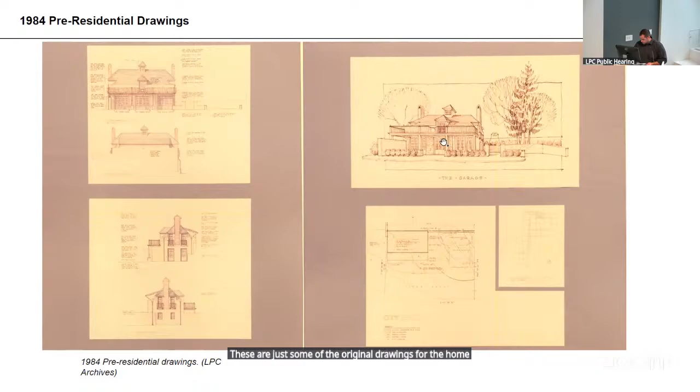Okay, these are just some of the original drawings for the home. Just a few sketches. On the right is what the finished property was supposed to look like. Okay, and that's just a close-up. A few more.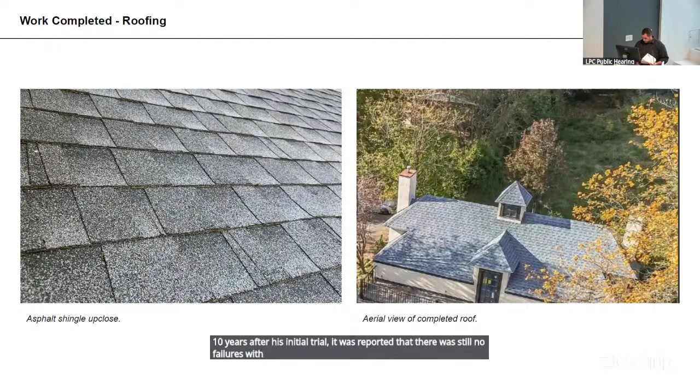So this is just another picture of the roof facing the home. It's from 2025. And these are a few of the neighboring homes that have similar roofing color and material. So on the left is 285 Flagg Place, that's the Walcott Cottage. And on the right is the Bocott Cottage, that's 95 West Entry Road. So on the left, the Walcott has the fake slate shingle roofing, and on the right, the Bocott house has the asphalt shingle roof.

Okay, so the next item is the windows. Slide 16 shows the previous condition of the home's windows. They are 10 pane and painted brown. I cannot attest to the material or how they operate, as I've never seen them in person, but only through old photos. So a little hard to see, but they're 10 pane windows, dark brown in color. That's the front of the home.

And these are the new windows. So it's the same layout, same color, but the material is a bit different. Slide 17 and the next one, slide 18, will show the home's newly installed windows. Just like the old windows, the new windows are also 10 pane. They're outward opening and painted in an identical shade of dark brown. The new windows are part of Marvin's Preserve line, which are a wood and fiberglass clad constructed window. The windows retain the classic look of all wood windows with a wood interior and fiberglass exterior for greater resistance to the elements, increased energy efficiency, and are less likely to rot over time. Notably, the new windows are an energy efficient upgrade. And the next, that's just a few more photos of the newer windows.

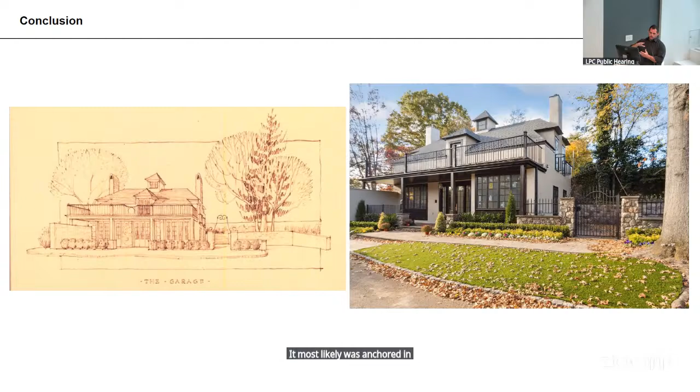Okay, and secondly, the finials on the railing, can they be removed? I don't think that they can be removed. When I was looking at the fencing up close, it looks like it's all kind of welded together, and it looks as if the fencing was placed on top of the stonework. It most likely was anchored in and then capped, covered, just to hide the screws. Thank you.

Other questions? Okay, not seeing any. Let's move to public testimony. Is there anybody in the room that would like to testify on this item? Okay, not seeing anybody. Let's move to Elizabeth Lee and testimony on Zoom.

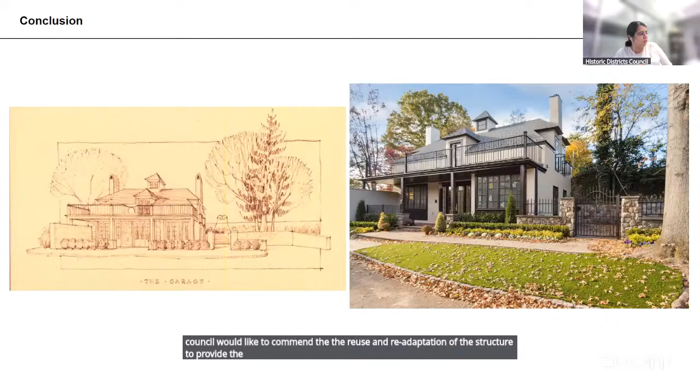It's now 12:33, so good afternoon, commissioners. My name is Manur Fatima, I'm representing the Historic Districts Council. The Historic Districts Council would like to commend the reuse and readaptation of the structure to provide the house with new opportunities for use. However, we particularly object to the roof material, such as the asphalt shingles, because they don't have the same texture as the original, and there's an opportunity to do good restoration work here. Thank you.

The next speaker will be Jeremy Woodoff. Jeremy, I see that you're unmuted. Oh, yes, good afternoon, Commissioners. Jeremy Woodoff speaking for the Victorian Society, New York.

Founded in New York City in 1966, the year after passage of the Landmarks Law, and as the first permanent preservation advocacy organization in New York City, the Victorian Society in America is dedicated to fostering the appreciation and preservation of our 19th and early 20th century heritage. The New York chapter promotes preservation of our historic districts, individual and scenic landmarks, interiors, and civic art.

The VSNY recommends denial of this proposal to legalize the removal of wood shingle roofing and the installation of new asphalt shingles at this building at the Flagg estate. The new shingles are overly smooth and the pale gray color is too light. They do not relate well to the overall character of this building or to others on the site.

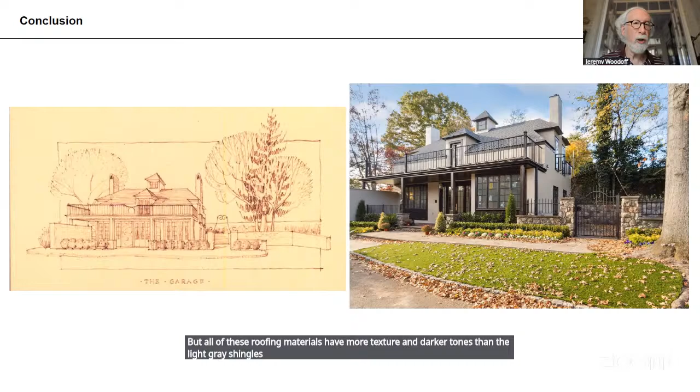The 1967 designation report for the Flagg House and the 1983 report for the expanded site mention roofing materials only in regard to the mansion and gatehouse. The only roofing material mentioned in the reports is slate. The applicant has also provided excerpts from Flagg's book, Small Houses, Their Economic Design. It recommends the use of inexpensive rolled roofing on modest houses. We do not find this relevant. Mr. Flagg did not use any inexpensive materials at his very grand estate.

We do, however, support two aspects of this proposal: the replacement of the windows and the installation of ironwork. They appear to conform to the 1984 design and do not detract from the appearance of the building. Thank you.

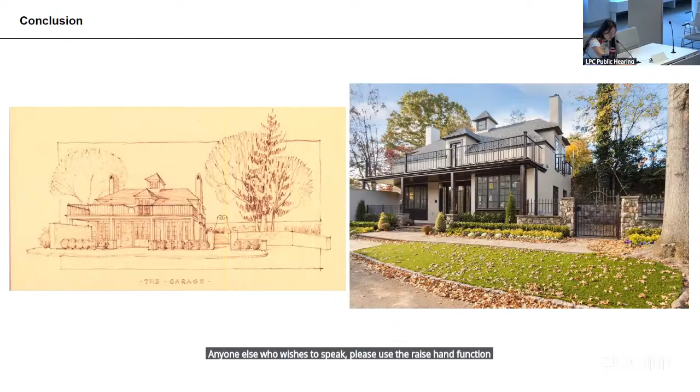Seeing none, a note for the record that Staten Island Community Board 2 recommends approval.

Would you like to respond to any of the testimony? No, I just want to add, this was a little unfortunate for me. When I purchased the home, I used my title company at the time, and they showed no existing violations on the property. It was only after I reached out about constructing a pergola over the driveway that I was informed of the violations. Had I known there were violations on the home previously, I would have most likely paused with the purchase. I wasn't the individual who initiated any of these changes with the home. I was trying to do everything the correct way and reach out, and it was only after that point that I was informed. So I just wanted to come today and try to rectify everything.

We appreciate that. Commissioners, are there any last questions? Okay, not seeing any. We'll move to our discussion.

As we've heard, this is an application to legalize window and roof replacement and the installation of metal railings. Oh, shoot, sorry, I need to close the hearing.

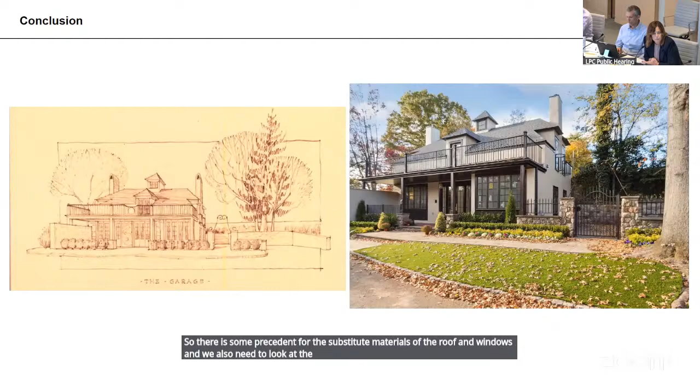So yes, the application is to legalize window and roof replacement and the installation of metal railings to a garage building that was modified and converted to residential with commission approvals in the 1980s. We want to review this to see if the changes made are appropriate to this overall landmark. This is one landmark on an estate, and the materials used here aren't out of place for the outbuildings and new buildings on the landmark site, so there's some precedent for the substitute materials of the roof and windows. We also need to look at these metal railings for appropriateness, and I think it'd be fitting at Staten Island.

So before I start, I want to put it into context that this house was heavily renovated in the 1980s. So when we think about this, this isn't necessarily a typical historic house, because it was a garage and it was renovated in the 1980s to the look that it is now.

So when we look at things like this, we ask ourselves, is this something we would have approved if you had come to us initially? And I understand this wasn't something you had done. Overall, I can find it appropriate because a lot of what we're seeing here, let me go through element by element. In terms of the roof, clearly the previous roof was in very poor condition, it was rotting, and you replaced it with an asphalt roof. You've shown us that there are other asphalt roofs on houses in the area that were also designated. So I can find this appropriate.

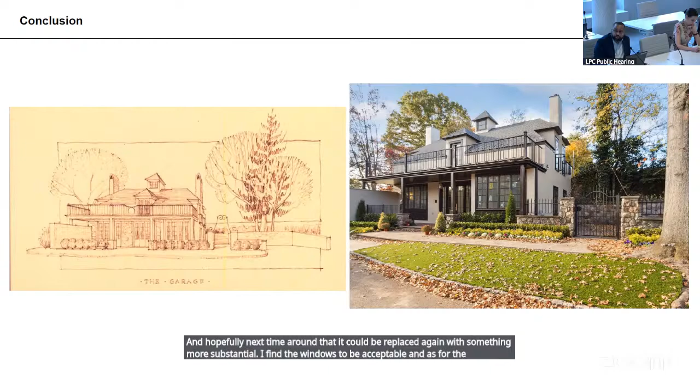I find the windows to be acceptable, and as for the railings, I guess the intent is to try to simplify them a little more by removing the finial. So I can see that as a possible solution, or replacing it, or even just removing it altogether.

Okay, Commissioner Chen. I think the solution to the roofing issue is, as Commissioner Ginsberg said, it is a perfectly good roofing at this moment, and maybe if the commission wants, wait till the next time they need to replace the roofing to replace it properly. Let's see what the other commissioners think.

I have no problem with the replacement windows. I think the windows are fine. I tend to agree with Vice Chair Master. I'm fine with the fencing as is, but if you deem that it needs to cut off the finial, I'd like to see what the rest of the commission wants to do.

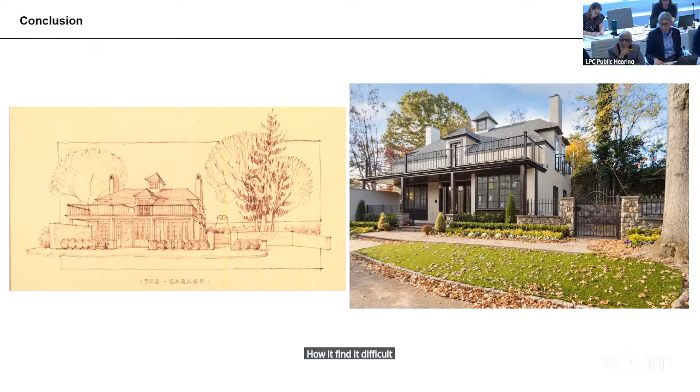Commissioner Jefferson. I would find it difficult because when you buy a house like this in a historic district, it means that you have to take additional responsibility for wanting to live there, than the human problem of what human beings go through.

This building, the roof is dominant, is the most important part of it. And the texture does make these buildings truly beautiful, at least to me. If there was a way that we could keep it now, and next time, 20 years from now, 15 years from now, it has to be redone properly. That way I can approve it, if we can get that kind of principle put into the LPC.

Okay, Commissioner Goldblum. Thanks. In the past, when we've had situations like this where people want to solve a problem with an existing situation that's not meeting the standards, didn't we usually not allow it, but give them a long time to cure it? Wasn't that kind of how we dealt with these things?

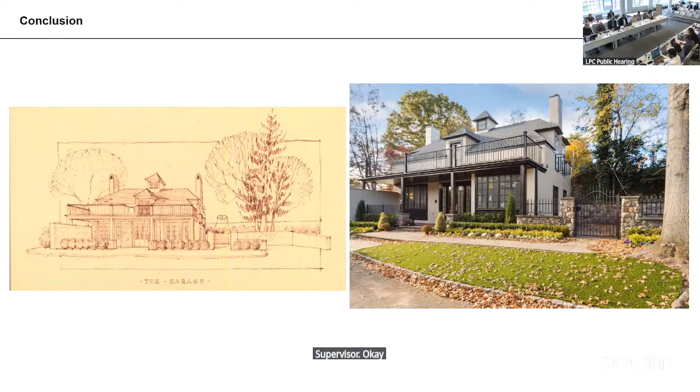Okay, I think we can make a motion, we have enough to support it. Would you be comfortable if we said that they should work with staff on exploring whether the finials can be removed? Yes? Okay, then let's go there.

In the matter of LPC 26-05642, 91 Flagg Place, expanded landmark site of the Ernest Flagg House, gatehouse and gate individual landmark. A garage building designed by Ernest Flagg and built before 1909. Application is to legalize window and roof replacement and installation of ironwork without Landmarks Preservation Commission permits.

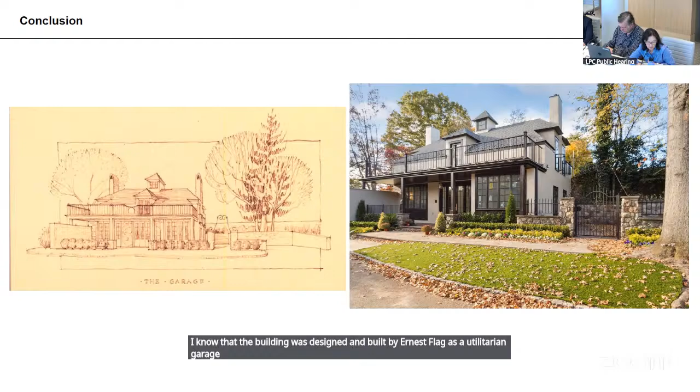I note that the building was designed and built by Ernest Flagg as a utilitarian garage related to his own estate. I also note that the garage was originally a secondary structure located within a portion of the estate behind the main mansion, later developed in the late 20th century with the conversion of the outbuildings for residential use and the construction of new freestanding houses. I further note that Flagg often added to the original massing and experimented with new technologies and materials at his mansion, outbuildings, and the other cottage homes he constructed on Todt Hill.

I recommend approval with modifications, finding that the work did not eliminate any significant architectural features, that the garage building was highly altered in the 1980s pursuant to a commission approval with an enlarged sloped roof and dormers when it was converted to residential use, that the building is set among other modified original buildings and newly constructed buildings which were part of the commission-approved 1980s development of this portion of the estate. Therefore, the use of substitute materials is contextually consistent with the materiality of new and modified buildings throughout this portion of the landmark site. That the 1980s wood shingle roofing was deteriorated and warranted replacement.

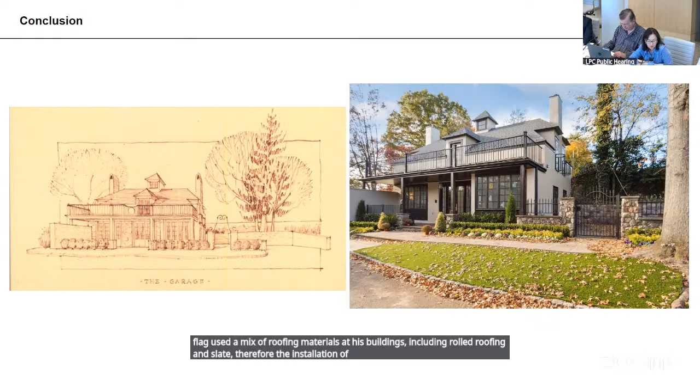That historic documentation does not clearly show the original roofing material, and Flagg used a mix of roofing materials at his buildings, including rolled roofing and slate. Therefore, the installation of gray asphalt shingle recalls the finish and patterning of these historic roofing types. That the multi-light casement window above solid panels reflects the size of the historic garage openings and are in keeping with windows historically found on buildings constructed by Flagg and with the configuration approved by prior commission actions. That the dark brown fiberglass-clad wood windows closely resemble wood casement windows in terms of the details and finish, and the change in materials will not be perceptible from the public thoroughfare, and that the work does not detract from the special architectural and historic character of the building or the expanded landmark site of the Ernest Flagg House.

I also recommend that the applicant work with staff to see if the finials can be readily removed from the iron fence.

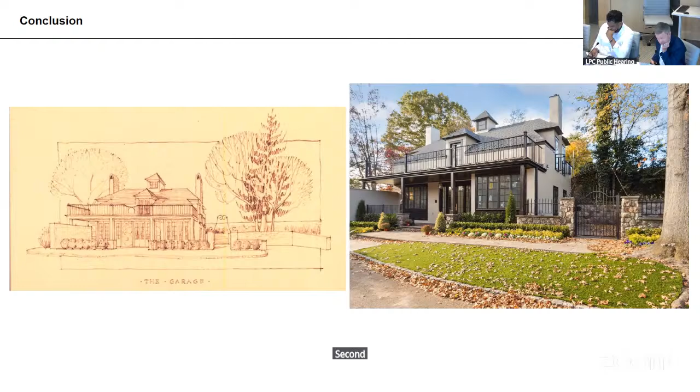Commissioner Mahan, will you second the motion? Second. Mark, can you call the vote? Director Savage, Aye. Vice Chair Master, Aye. Commissioner Chen, Aye. Commissioner Ginsberg, Aye. Commissioner Goldblum, Commissioner Quimby, Aye. Commissioner Jefferson, Aye. Commissioner Mahan, Aye. Commissioner Wilder, Aye. With 9 in favor, none opposed, the motion passes.